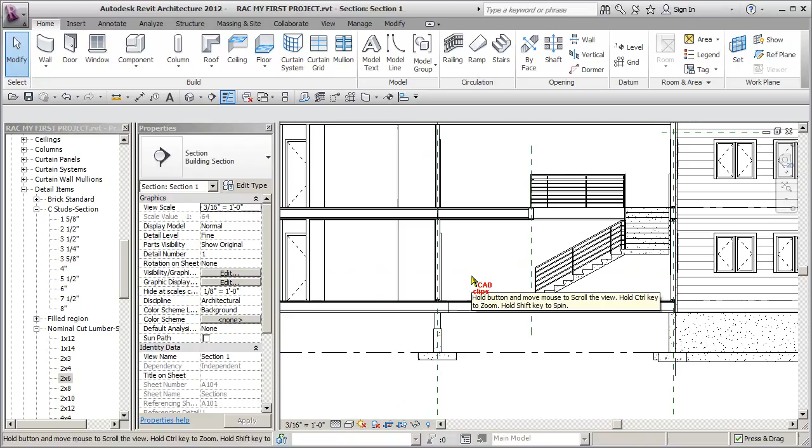The next thing we want to try is to add in our keyway down in our strip footing. We've got one here and we've got one on the other side. So again, as a 2D detail item, if we go to the View tab, I think this should be on the Annotation tab myself, but hidden way over here is something called Cut Profile.

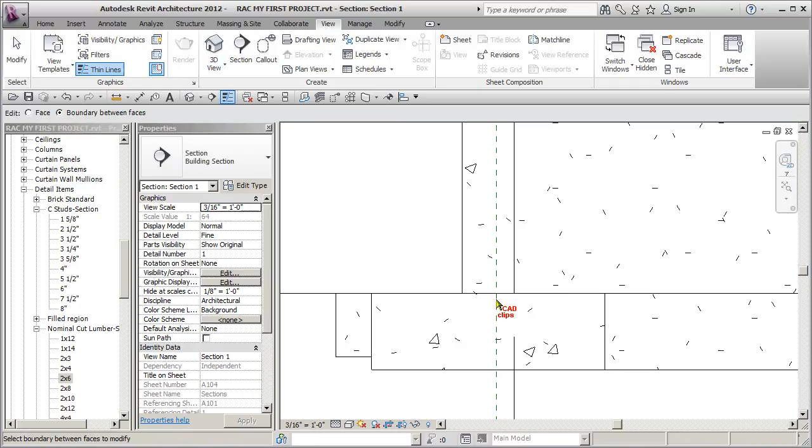Changes the shape of elements cut in a section or 2D. So you can go in and you can edit this just like it's showing you there, and you can edit the profile of how they're being cut. Okay, so watch what we do. We pick here. First thing we have an option is, do we want to edit the face of it, meaning just the face of this, or do we want to edit the boundary between the two faces, like this line? Do we want to edit this line, or do we want to edit this object itself?

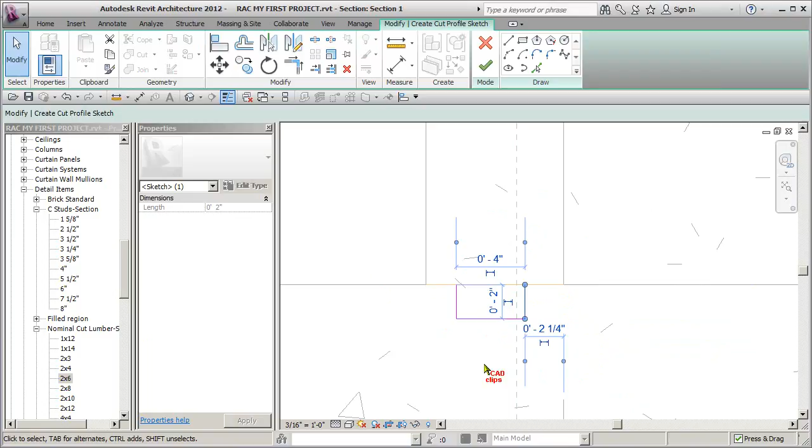So what we want to do is edit the boundary between here. Pick here. Now all we have to do is zoom in and draw some lines. We're sketching lines. That's all. The lines have to start on one side and come back to the same orange line. You cannot crisscross or go over it, but from inside of here you can do whatever you want. Finish, click out, and there's our edit cut profile.

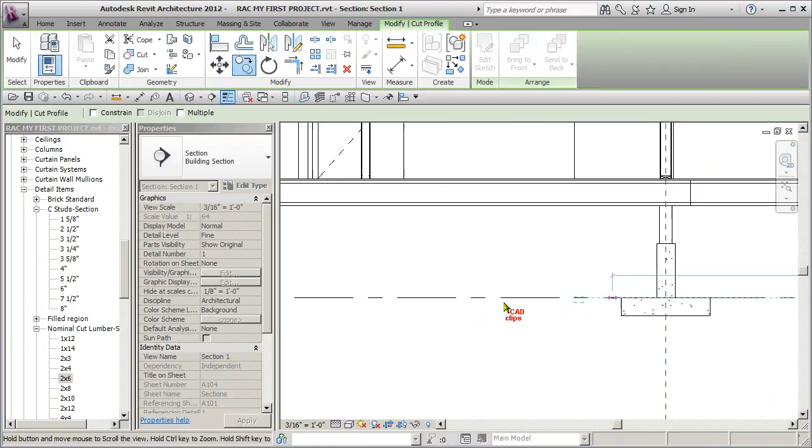We can actually take this now and copy it. A lot of people don't know you can do that. Watch, pick on here and I'm going to say copy from here to, I don't know if this might end up getting you in trouble later on, but oh, okay, I take that back. I guess it didn't work. I'm pretty sure it has in the past.

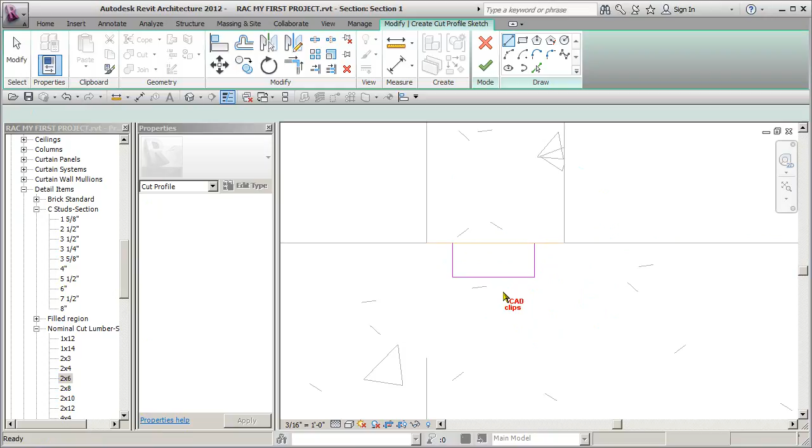Edit cut profile, boundary between lines, pick on here, draw a line. I should be more specific with my size, of course. You can read the numbers there, 2 1/4, so 2 inches by 2 1/4. Escape, click, click. Now I can take this at any point and pick on this number and make it 4 inches. Okay, and then I can take these guys and nudge them over, etc.

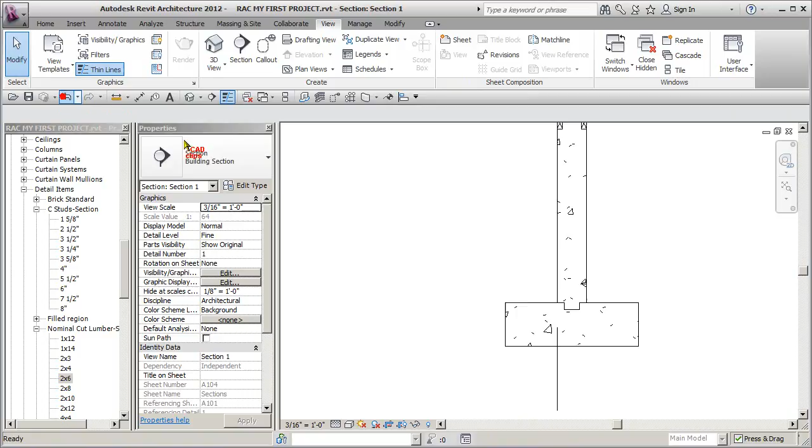Finish, and I'm done. Now you're still seeing a line, but that's because of this. That's the elevation line that's there. Okay, the level line. So I'm just going to undo the hiding of that. So edit cut profile you can do anytime in a section. You can pick on here, and you can go edit cut profile off of here, I should say. Okay.

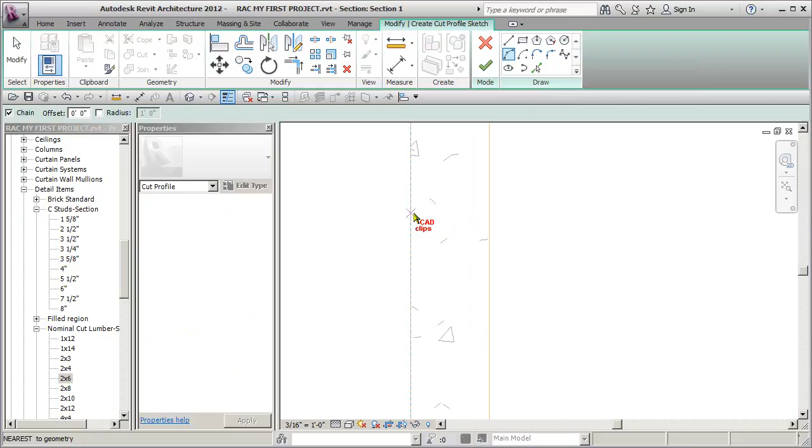And I can just say face, and I can pick on here. Pick. Now watch. I can go in here now, and I can draw an arc even. I can draw an arc that goes from here to here, out to there. Okay, and then I can actually continue. It doesn't have to be just one item. I can edit the profile of this any way I want. Back to here, escape, escape.

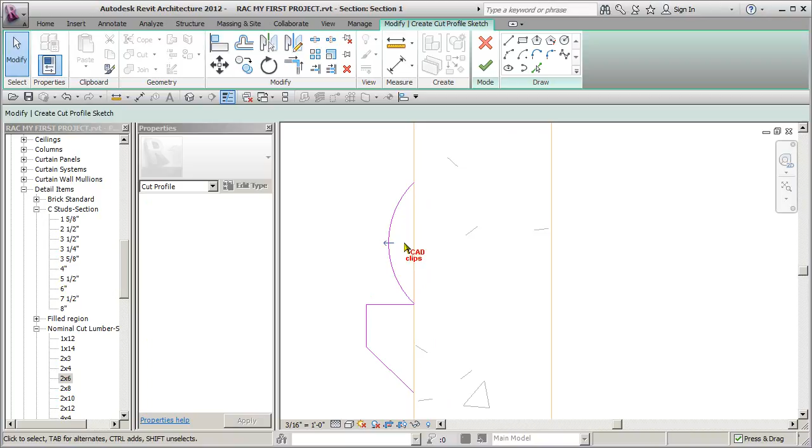Now, you see this? The little arrow means add or remove material. I want to keep this side, so I want to flip this arrow to the inside, and then when I finish, it does this. Oh, that didn't seem to work. Let's undo this. Maybe I need to flip my arrow this way. Finish. Still didn't work. Okay, what happened?

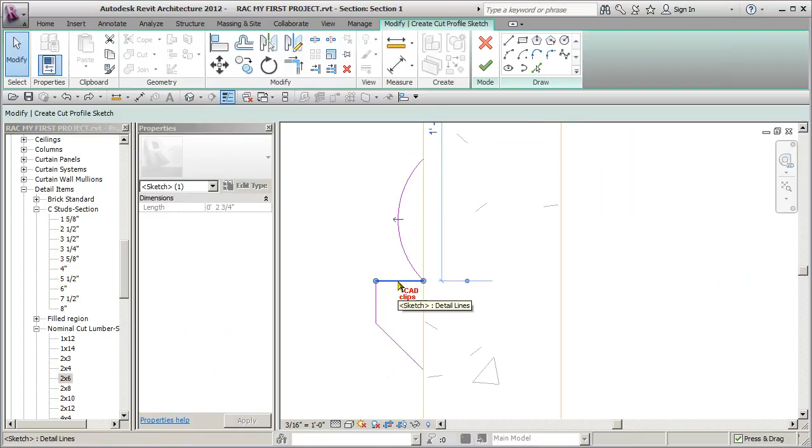Undo. Is it because this touches it more than once? Let's get rid of this. I want this to flip in and hit finish. Click out. There we go. That's going to work better. Okay, but also I did an edit face. I'm wondering if, let's take this guy and just delete it.

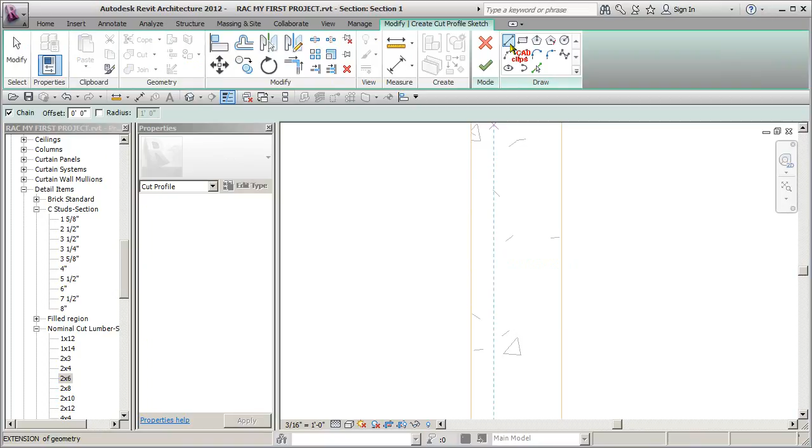Let's try it again. Edit cut profile. Boundary is what I want, I'm pretty sure. Click on here. And if I draw a line that goes like this and back to there, and I hit finish, it naturally doesn't do it.

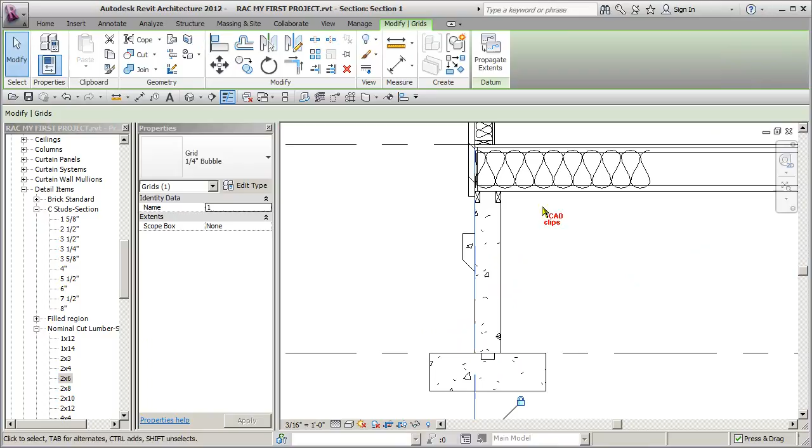So if I hit this to flip it, that should retain it. Okay, I'm wondering why I'm still seeing this line. That's the line I'm seeing, hide element. There we go. That's what I'm expecting. So this is just a 2D change.

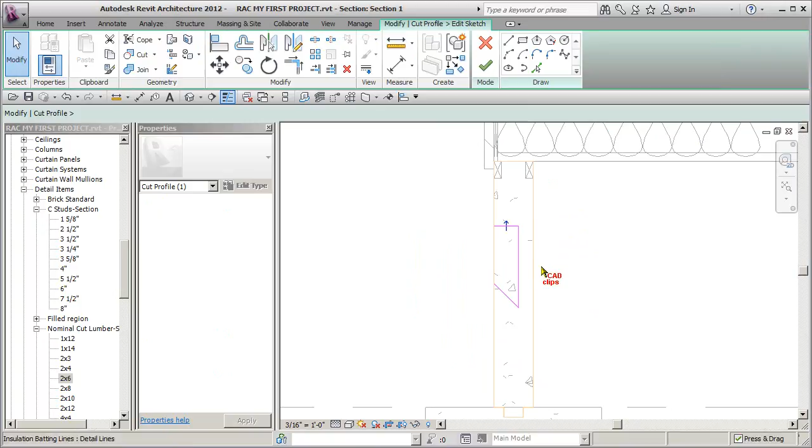Watch, edit sketch. Okay, if I was to take this and pull it over here, this will be different. This says retain this part. So if I finish this, it'll remove the material. Okay, click on here, edit the boundary. So if it's on the outside, you want the flip in. If you flip it out, it means keep this, which means you're not going to get anything. Okay, undo. So when it's on the outside, you want the arrow pointing in, so it adds material.

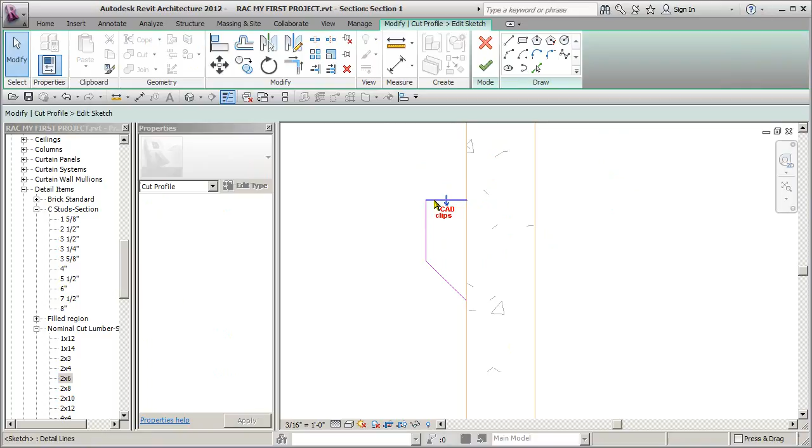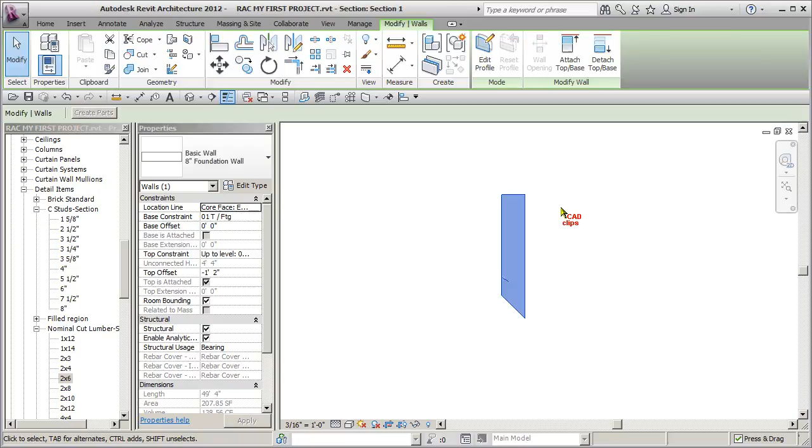And then when you edit the sketch of a cut profile, if it happens to be on the inside, then you want this pointing to here, because if it points to here, then it's going to retain this, which means there's going to be nothing left of your wall, right? So back to edit cut profile. Oh, cancel. There it is. Edit sketch. Flip this back to retain. You see, this is the part you're going to retain.

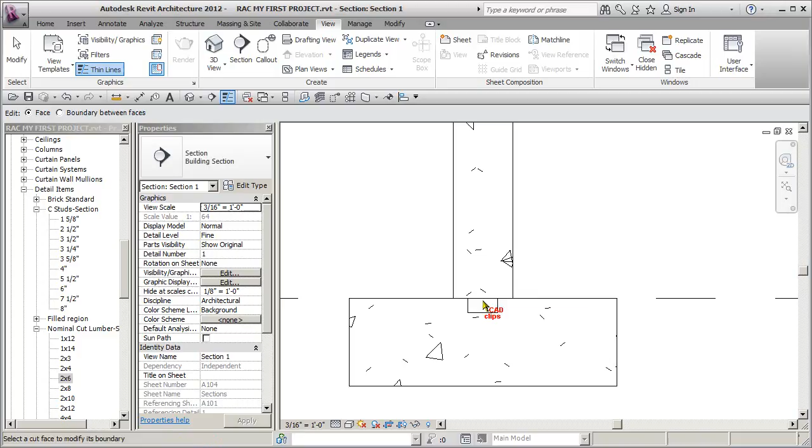Finish. Okay. So there's what happens if you cut the profile between faces, or sorry, boundary between faces. Boundary between faces does this. It pushes one into the other. And this one just edits the actual face. You think of how this wall is cut. You see how it's highlighted? That is the cut face of this. And that's what you're doing by going in here, is editing that cut profile.

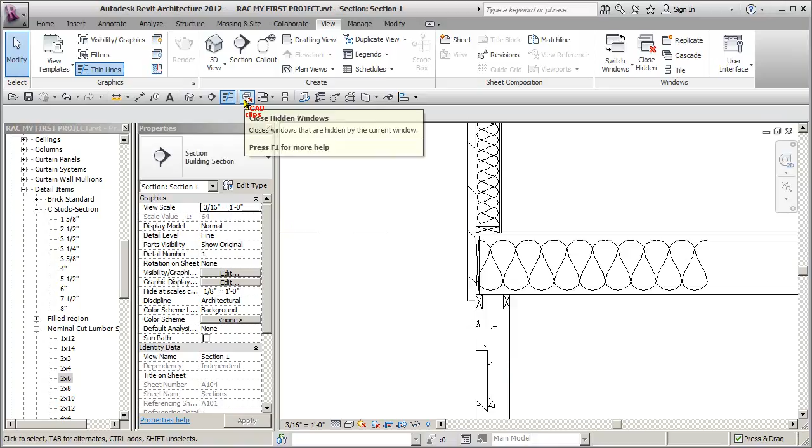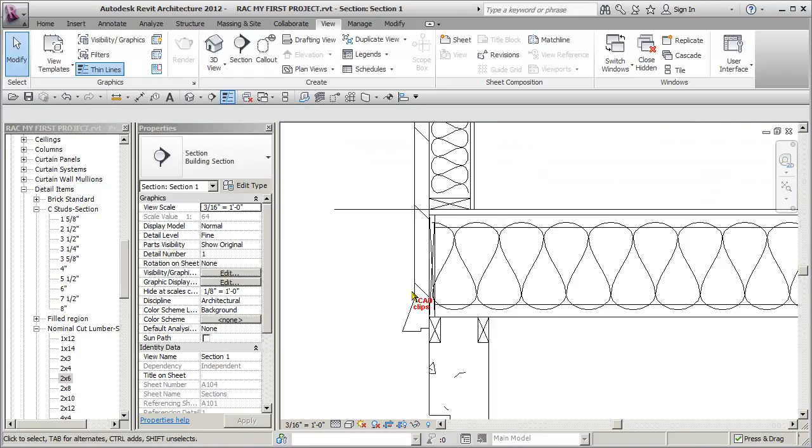You could do the same thing with this wall. You could say cut profile, and you could pick on this wall over here, and you could say line, and I did say face, by the way, and then however you want to detail this, you could go like this, escape, you flip this guy in and finish, and all of a sudden you've got a little different detail. So it's very easy to go in and use this to edit what Revit is giving you as the 3D section of everything. So if you ever want to round these off or edit the face of it, you can go in and say, okay, edit the face of this.

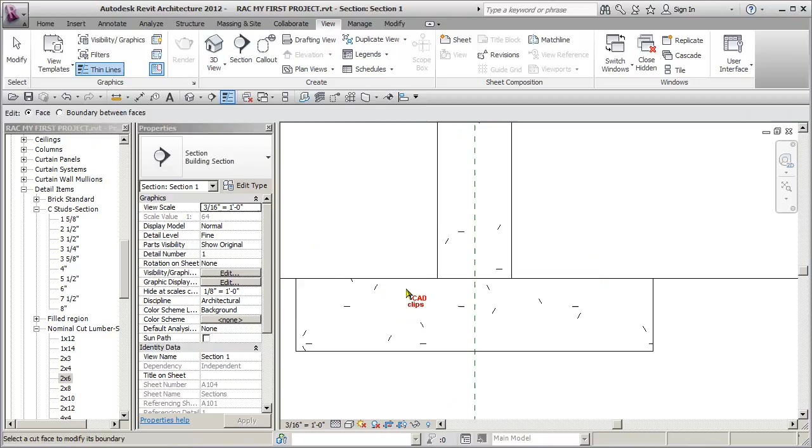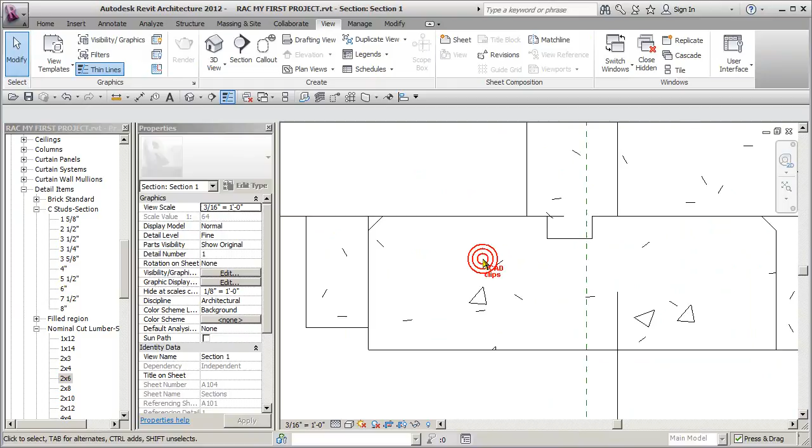View, edit face. Oh, this is in elevation. That's not in, has to be cut. Pick on here. I could go in now and just draw some lines and go like this. Now I would probably model the footing this way. Can I do both of these at once, I wonder? Okay, finish. See, oh, I got to keep my arrow on the outside. Finish. Will it let me do that?

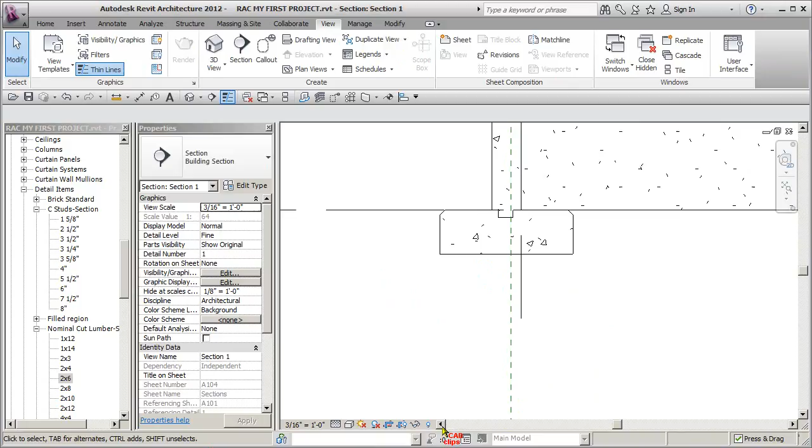Click out. It did this one. And it did do the other one. It's just that this is in behind it. Let me hide that element. And there's another one in there. But I did end up cutting that. Okay, so that is the edit, the cut face, and then this is editing the boundary between faces.

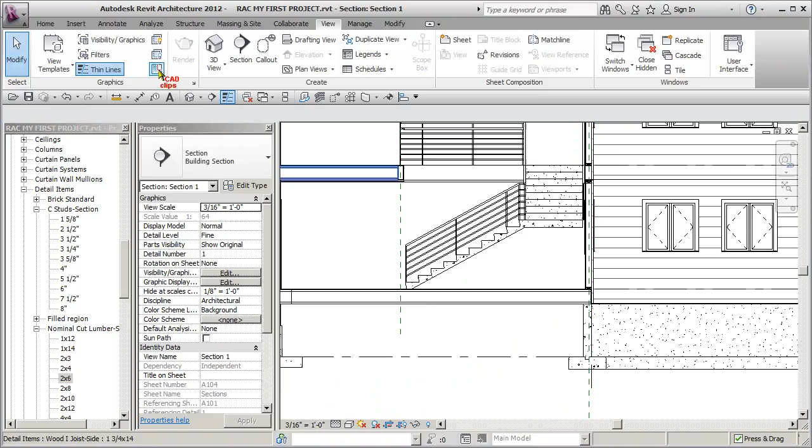So let's go back and see what I've been turning off here. Let's go like this and say unhide these elements, unhide the categories, go back, and the only thing is I've left my trees on. I want to hide that category, in fact. Okay, so the great cut profile tool for detailing. Good for cutting or modifying anything that is being cut, a 3D item being cut by Revit.

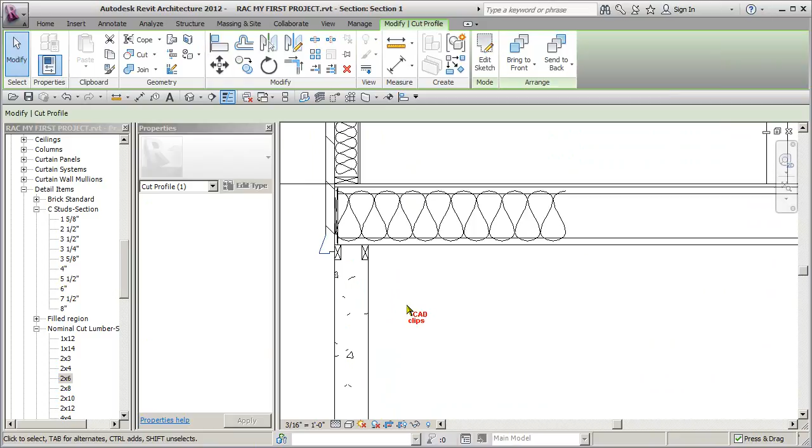To get rid of it, all I have to do is hover, tab to select it, delete it, and it's gone. If you click on here and delete it, it's gone. Again, these are 2D only. This does not ever get seen in a 3D view.